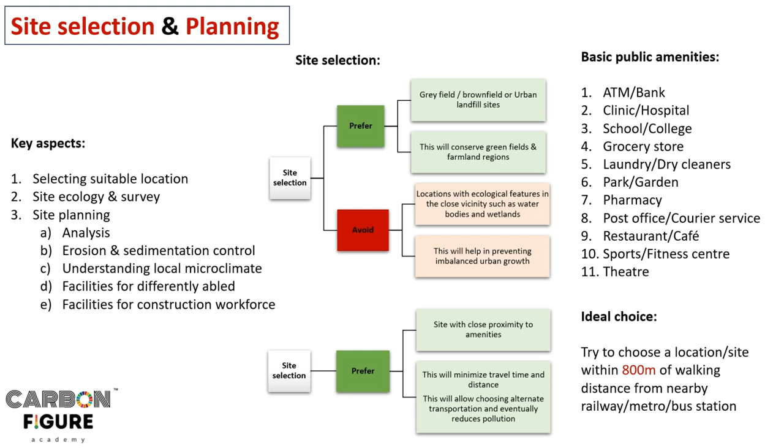Site ecology and site ecological survey: what are they, and why are they needed? Site ecology evaluates the natural ecosystem, including plants, animals, soil and water, on a potential building site. It ultimately focuses on minimizing disruption and enhancing ecological balance during site selection and development.

A site ecological survey is a detailed assessment of the existing flora, fauna, soil and water conditions, water bodies, their age, their spread in terms of area and the quantum of water they hold, on a potential building site before development. Once you take up such a survey, your design should align with the ecological features of your chosen site. So how does it benefit?

It identifies sensitive habitats, species and ecosystems, allowing strategies to protect and preserve biodiversity during construction and development. It helps make well-informed decisions by understanding the site's ecological features, ensuring minimal disruption to natural ecosystems. It also ensures compliance with local and national environmental regulations, reducing the risk of legal issues and project delays.

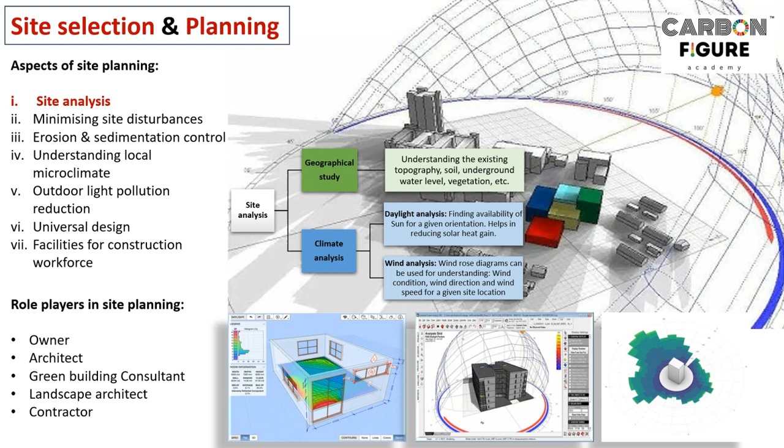So how to minimize the site disturbances? First you should understand how all this happens. It's like a chain of activities. Once you go for the development of a new built environment, it obviously disturbs the existing topography. Those disturbances ultimately lead to loss of native species. So there are certain strategies and benefits. Why should you minimize the site disturbances? So first, strategies for preserving the existing topography.

Designing landscapes with multi-culture plant species and avoiding monoculture. Obviously you should be giving significant time and effort to understand the native plants, which are highly comfortable and adaptable for the given location, and you should get seasonal adoption of different types of plants for your landscape, avoiding monoculture. Right, preferring native and adaptive vegetation.

Native and adaptive vegetation further explained: every location has its own tendency of supporting certain plants and opposing certain plants. Those supported ones are called native plants. They will ultimately require a lesser amount of irrigation than invasive or foreign plants for a given location, right? So in case of unavoidable disturbances, at least try to design the landscapes over the built elements.

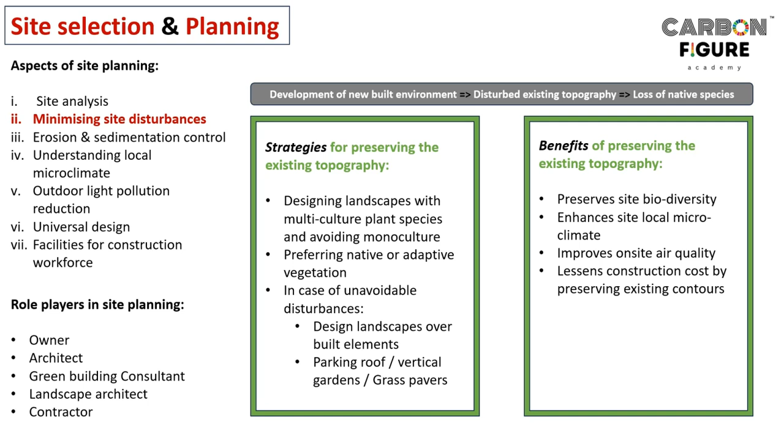So next aspect of the site planning comes erosion and sedimentation control. So soil erosion is nothing but loss of soil from land surface due to gravity, wind or water flow. So once it happens, what it would lead to? Nutrient loss, exposes deeper soil which cannot hold water, aquatic habitat disruption, increased aquatic plants such as algae. So these are the issues.

So how it can be controlled? So soil erosion control can have two different aspects: erosion control through soil stabilization and sedimentation control. So soil stabilization in the sense planting trees and vegetations, because those roots would help in capturing and holding the soil mass underneath. Then permanent and temporary seedings, right?

So seedings in the sense not for some big trees, but still, for like grass kind of things, so that it would grow up, minimum height and with minimal requirement of continuous irrigation, so that it would stay there and just hold up this topsoil without getting eroded over the time, right? Under sedimentation control, we have different options like earth dikes, silt fencing, sediment basin and sediment trap.

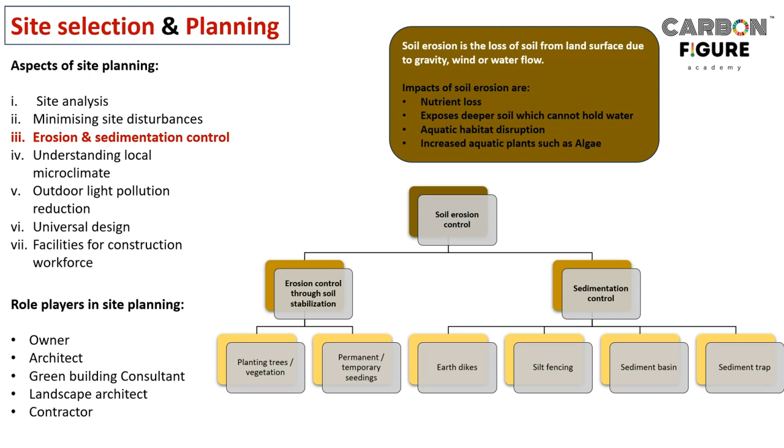So these soil related protection measures have to be followed not only after the construction but during the construction as well. So if you see different visuals for pre-construction measures, these kind of strategies can be preferred: topsoil stacking, site barricading, preserving existing vegetation and wheel washing.

So wheel washing is nothing but like, a construction site typically can be seen with a lot of vehicle movements coming into the site and going out of it for the purpose of carrying the labors, the materials or whatever the things, right? So whenever they come into the site and go out, during their wheel movement, a lot of topsoils are becoming swirled and being taken away, all the places wherever the vehicle goes.

So that has to be avoided, because that is what is being mentioned as the topsoil, and obviously it connects with the construction site air pollution issues as well. So wheel washing is ultimately a good measure. Then preserving existing vegetation, not disturbing them, protecting them with some side layers of temporary fencing or that kind of thing.

Then site barricading, so that whatever the topsoil is getting swirled into the air, it is not leaving far away from the site boundary, restricting it with the help of some barricading setups, right? Then topsoil stacking, it is being advised in case of large projects especially. So the topsoil is nothing but the matter of 2 centimeter to 4 centimeter, people say, right?

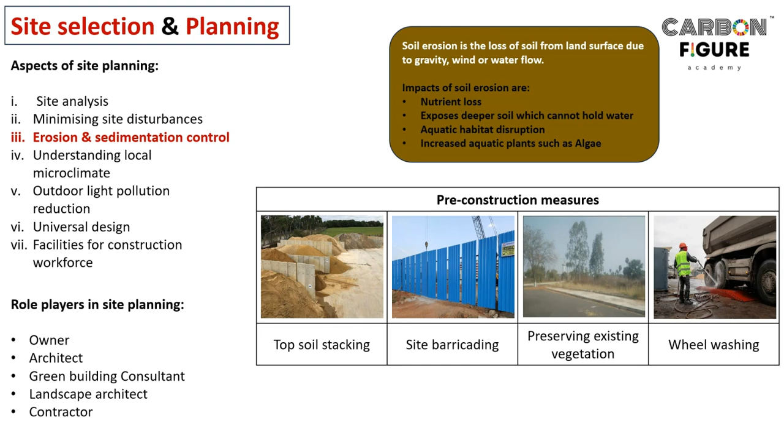So those are fertile in nature, and those have the capacity to hold up the water and hold up the nutrients and all those things. So those topsoils can be scraped and stored safely at a particular corner of the site, so that once the major construction is done, you can refill them onto the place again, right? During the construction, these are the things that can be done.

Sedimentation basin: it's a temporary basin at the lowest point in the site, so that the rainwater or whatever water spills gets collected and the sediment is stored in that basin and settled, right? So it is avoiding the loss of the topsoil. Again, the same can be dried out, taken out and put back onto various parts of the site post construction.

Contour trenching: earth embankment or ridge channel arrangement to reduce the runoff velocity. It holds moisture and helps in minimizing sedimentation loading, especially in cases where the contour is vastly different across the site, right?

Then finally we have earth dikes and silt fences, a temporary berm of compacted soil to channel the water to the desired location. It diverts the sediment-laden water to appropriate traps, so that once the construction is done, we can dry it, take it back and pour it again in the original locations.

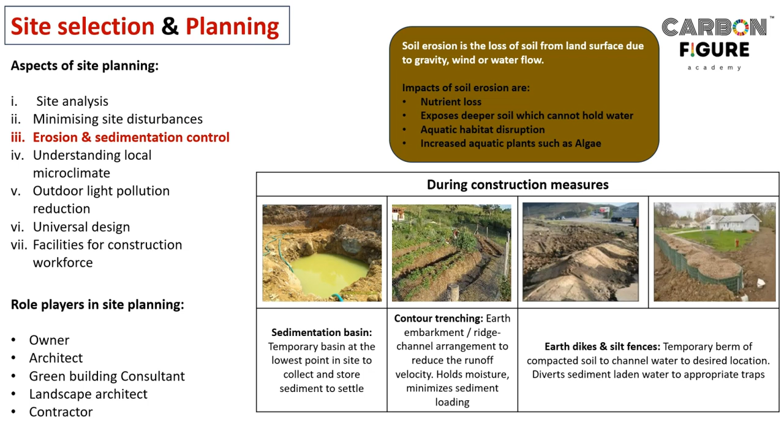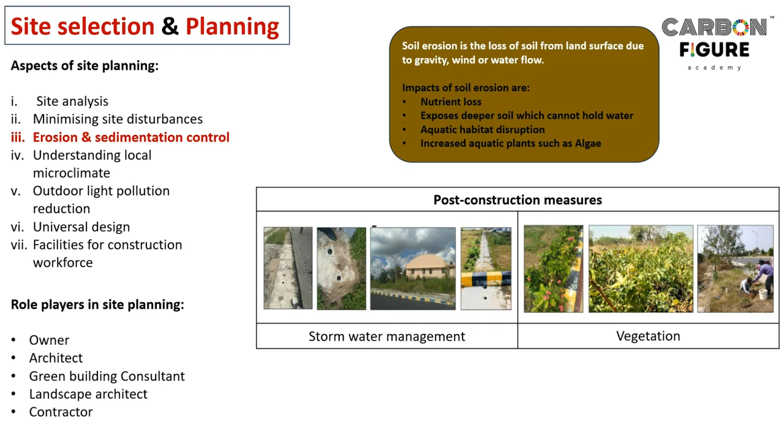Post construction measures: we have stormwater management like rainwater harvesting and runoff harvesting, maintenance systems, then proper vegetation, right? So these are the things which come under soil erosion and sedimentation control.

So ultimately urban heat island refers to the increased temperature, up to at least 5 degrees Celsius, in urban areas compared to the surrounding rural areas. That temperature difference is referred to as urban heat island. It is due to human activities, obviously.

We run machines, and vehicles continuously emit heat energy. Then materials like concrete and reduced vegetation absorb more sun than reflecting it back into the atmosphere, so a kind of zoning happens around the city premises, and in that zone we feel more temperature, right? So that is called urban heat island.

This leads to higher energy consumption, because when you feel more hot, you need more refreshment in terms of using air conditioners or fans or other electrical equipment, right? That ultimately worsens the air quality and public health risk in the cities. So what are the measures we can take?

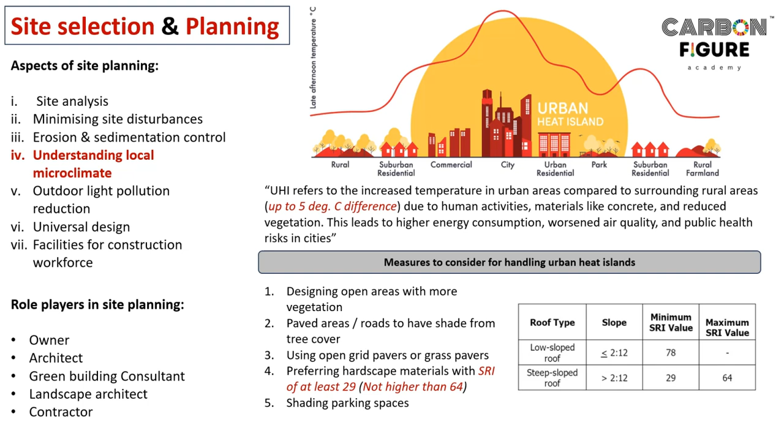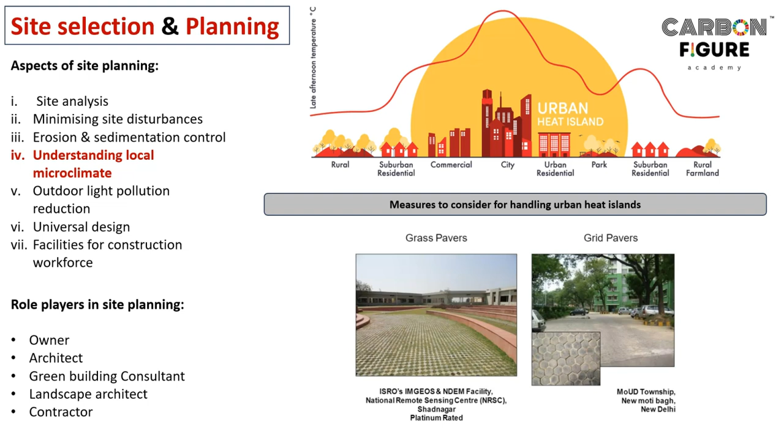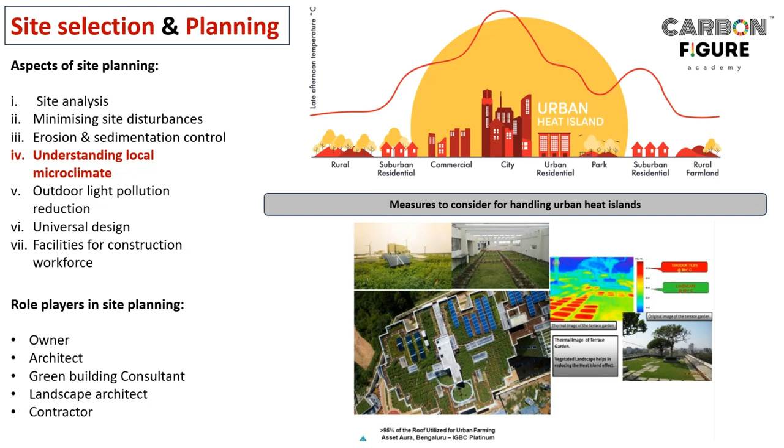Then we have the measures. These are the visuals for grass pavers and grid pavers. Grass pavers means, instead of making it completely paver blocks, using them along with a grass layer, so in the simulation you can understand the difference between complete red and red blocks integrated with green lines. That's the impact difference between plain pavers and grass pavers. It helps in reducing the intensity of heat migrating into the building through the roof surfaces.

This is paint which has some SRI value, and China mosaic tiles. Ceramic tiles in bright colors are preferred as a green building strategy for reflecting extensive sunlight from your rooftop, so that lesser ingress happens, and that ultimately helps you avoid excessive HVAC installations.

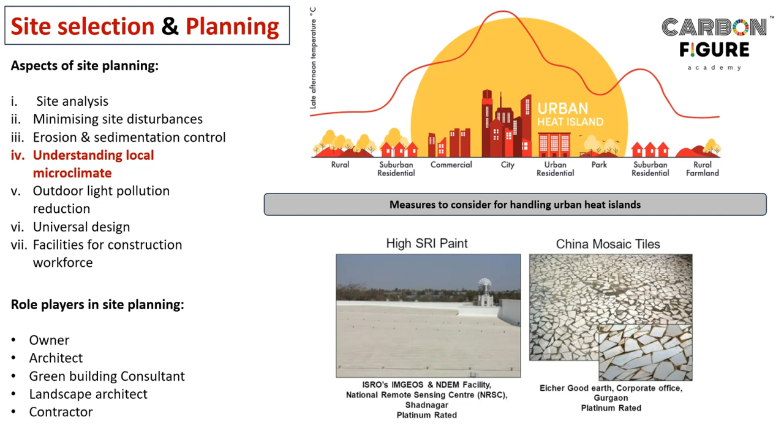The next aspect is outdoor light pollution reduction. The visual clearly tells you that, with our landscape lighting fascination, we may lose the connection between ourselves and the eternal sky during the night time, right? The acceptable and unacceptable scenarios are shown very clearly here. The first type of light you can see here is completely open, 360 degrees, and it completely washes out the visible night sky from your point of view.

The next level of choice is putting a small lid over it, but still it is a very bad choice. Again, limiting the light per area and expanding the lid cover, but still it is a bad thing. Ultimately the better choice is this kind of complete surrounding of your light, so that only the pathway gets lit up, not the eternal skies.

Finally, the best thing is fully shielded and timer-based lights, because we may roam around during the night from 6 p.m. to 10 p.m., or maximum 11 p.m. That's all. Afterwards, outside movement will be reduced and indoor movement will be more, right? Which means we may stay back studying, doing work, or household chores, all those things.

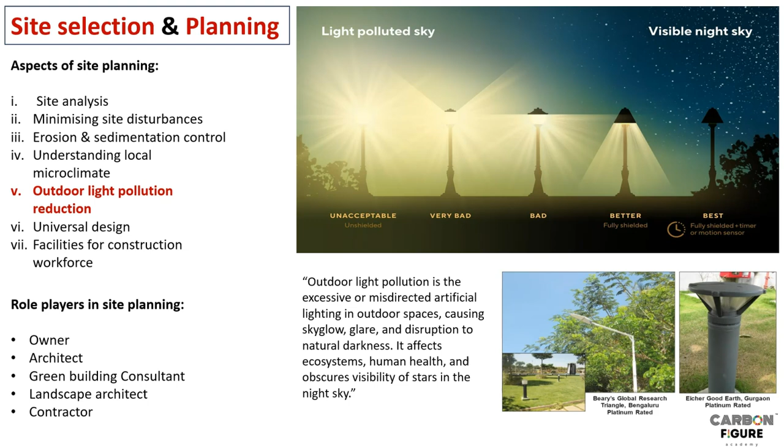There are some ECBC baseline requirements with respect to how much the light power density should be, based on the location where it is fixed. If it is a building entrance, 10 watts per square meter, and if it is stairways, again 10 watts. If it is outdoor landscaping, it is 0.5 watts per square meter. You can understand, once the location comes out of the building, the requirement is reduced, right?

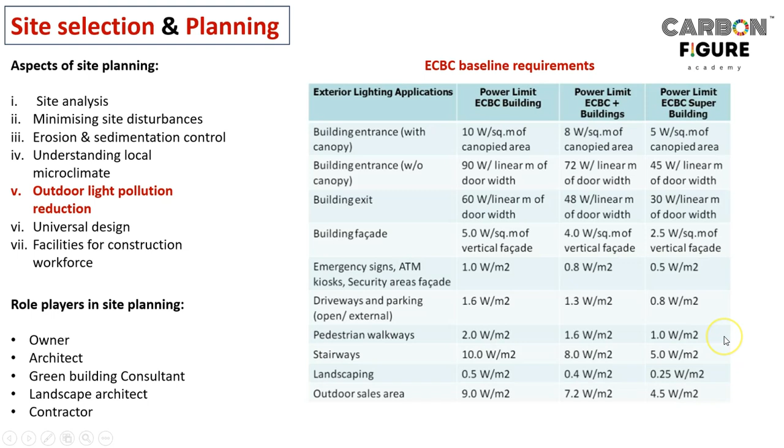And there are 3 different ECBC ratings, and accordingly the requirement becomes more stringent, so you can see from left to right the values are decreasing, right? ECBC compliant building is the lowest rating, I think, so that is its value. If you want to achieve a higher rating with respect to ECBC, you have to adhere to the more stringent values. That is the meaning here, right?

Then we have universal design, under site planning, a very important thing. Universal design indicates creating spaces that are accessible, usable, and inclusive for people of all abilities, ages, and genders, ensuring equal access without the need for adaptation or specialized design. If you have a public building especially, or a massive residential apartment setup, you should consider these kinds of things.

If you are designing your own private home, a big bungalow, that's up to you, how you want it to be. But especially when you design public spaces and public infrastructure, especially bus stations, metro stations, airports, government offices, government clinics and hospitals, and obviously malls, cinema theaters, entertainment and refreshment areas, those kinds of infrastructure have to be thought about seriously at an early stage, so that the concepts of universal design are adopted.

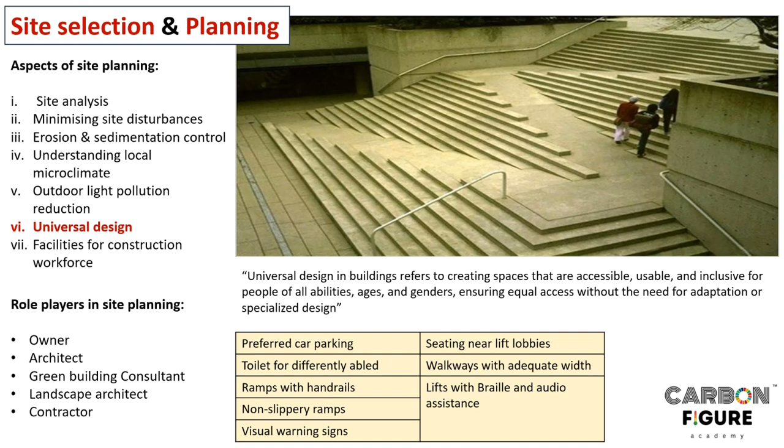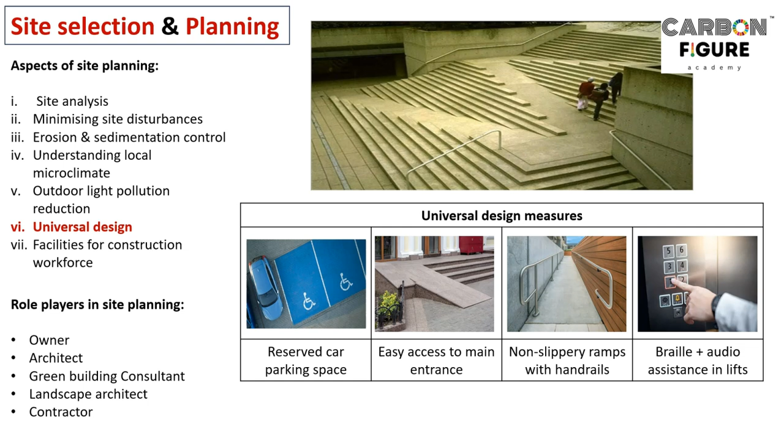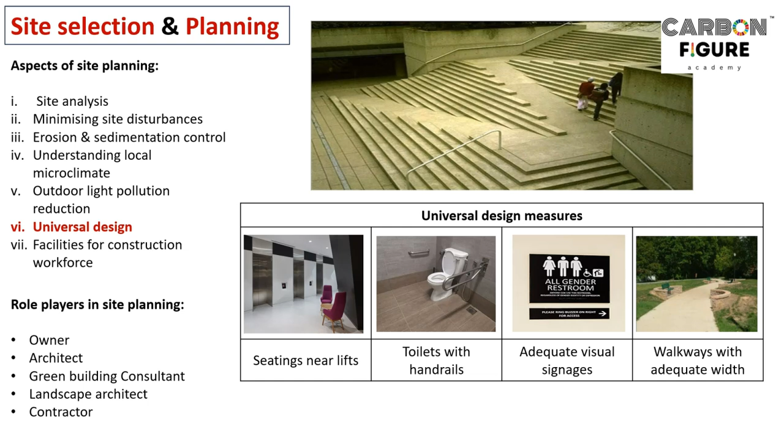Then the adequate visual signs, because the restrooms are the ultimate locations where different sorts of people would go in case of a public building, right? So which one I should go to has to be clearly mentioned. It should include the transgender as well. The third gender image is actually meant for the transgender, and differently abled people also can use that as well. So there might be one particular washroom or toilet designed for the differently abled people, right? And in the last picture you can see walkways with adequate width, so enough room to walk freely, right?

So the final aspect of site planning is provision of facilities for the construction workforce, very important, for enabling safer and healthier working conditions, so these kind of minimal provisions should be there. Facilities for the construction workers can be referred to the guidelines of the Building and Other Construction Workers Act 1996 and Rules 1998. That code provides the basic requirements for the construction workforce.

It includes providing them adequate housing, sanitary facilities in the construction site for both men and women, first aid and emergency medical facilities to cope with any unexpected accidents, and enough illumination at site, because they should not work in dark rooms, right, without knowing what is there, where they are standing or where they are hanging, right? So these are the ultimate things in case of site selection and planning.

So just to revise, the entire site planning consists of site analysis, minimizing site disturbance strategies, erosion and sedimentation control issues and mitigation strategies, then local microclimate, nothing but urban heat island and mitigation, then outdoor light pollution reduction strategies, finally universal design and facilities for construction workforce. So in the next video we will be moving on to module 3, where we will be completely talking about sustainable landscape.